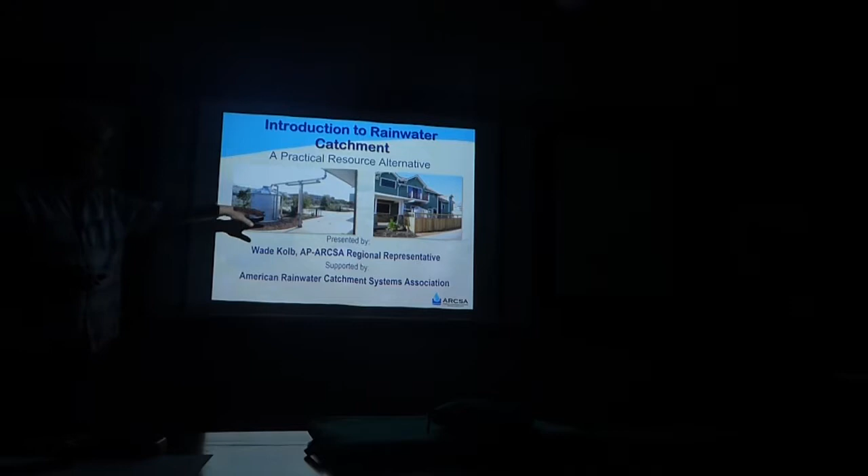They've kind of changed their rules around a little bit, but that's what the AP stands for. So everybody recognizes this, or most everybody here knows where that is at Eco Centro. And that's a great little system. I just never knew why they didn't plan on pumping the water to the back for the gardening area. It kind of just delivers water to some of these landscape zones, right?

And this is a little project that I worked on in the Mueller development in Austin. One of my first little residential things, and those lots are real tight. But this guy was going to get some solar panels and whatnot. But you can see how difficult it is to get your gutters and downspouts working to try to deliver as much water to the tank as possible.

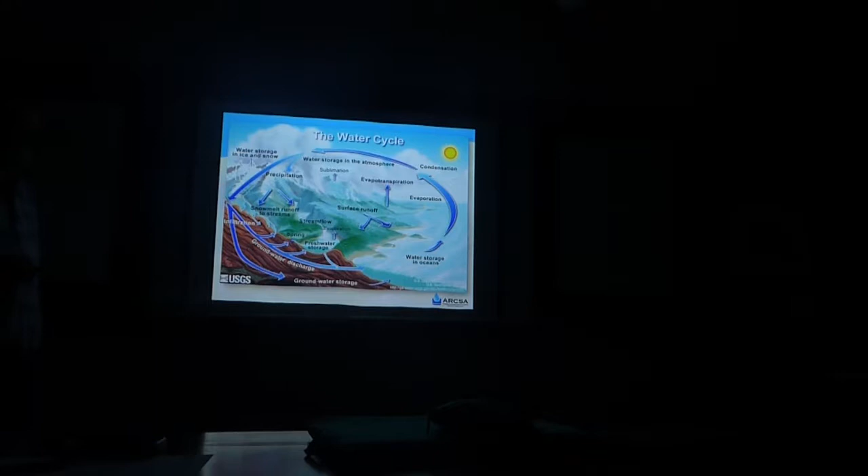So everybody understands the water cycle, I'm sure, from elementary school. We've got a serious deficit in water worldwide, and when I got into this, it was after the '08 crash, when I lost my permanent employment, and like a lot of things that's happened over the last 10 years, everything's just mushroomed for problems left and right. But this is a very serious issue.

Rainwater is the primary source of all water. As it falls, it's the purest water available. It's balanced pH, which is why the plants thrive on it. It doesn't contain any pathogenic or bacteriological agents.

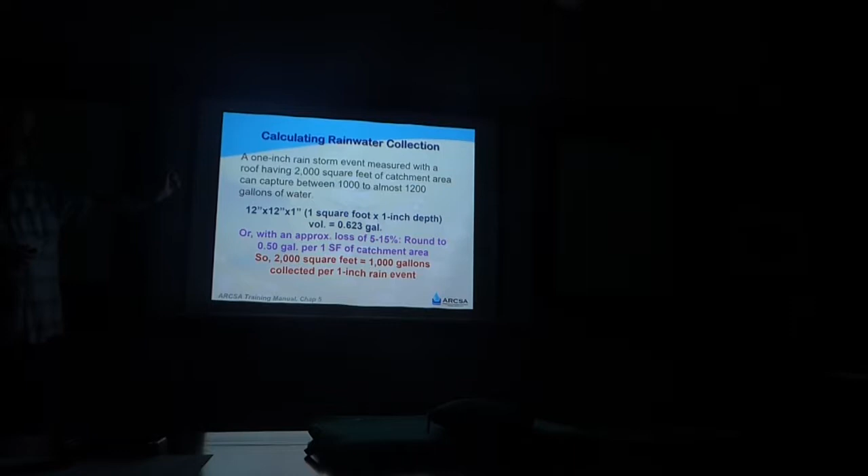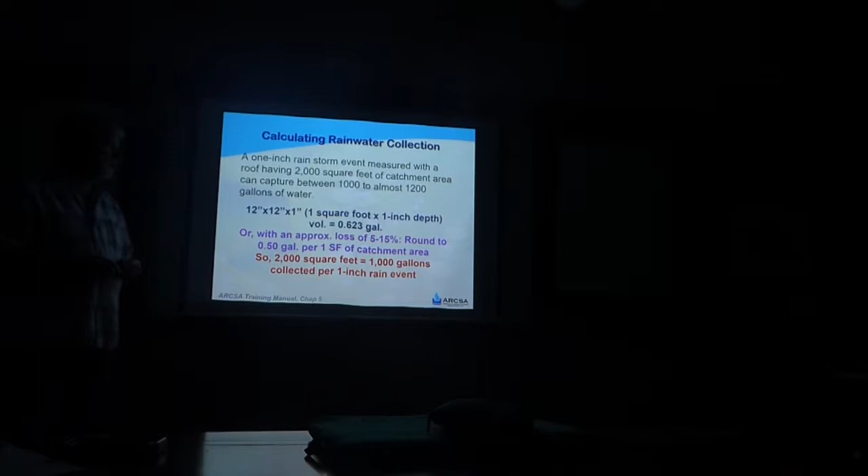So, real quickly, this is the official way to calculate how much rain you can pick up with an inch of rain on a 1 foot square. You calculate that as 0.623 gallons per inch. So really with the loss and splashing and first flush that we're going to talk about, the best way to think about it is a half a gallon per foot. So if you've got a 2,000 square foot roof and you get an inch of rain, you can pick up 1,000 gallons. Whenever I look at that, that's amazing.

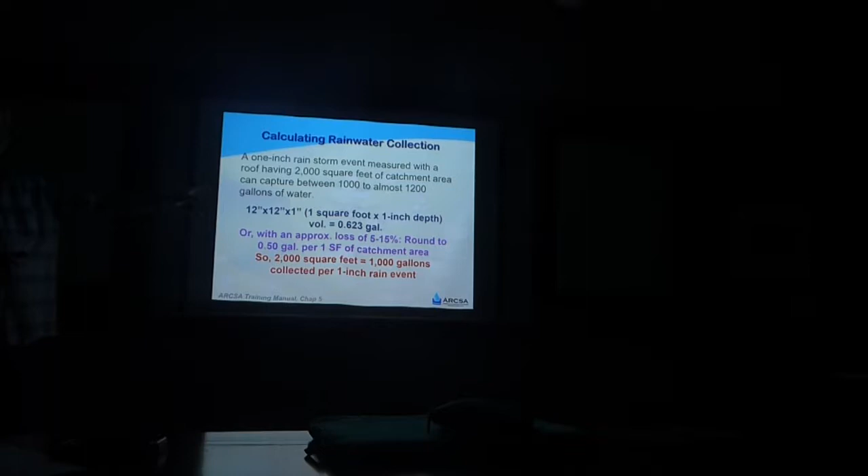I'm passing around the ARCSA manual. If everybody wants to peruse through that and look at it, you can look at chapter 2. My name's on that one.

When you really look at people that are living on potable use of rainwater, the best thing that they can do is learn how to take a Navy shower. If you can do that, you're going to be able to live with a lot of water with very little rain. And I can talk a lot about people who do live on rainwater, and they live on very little.

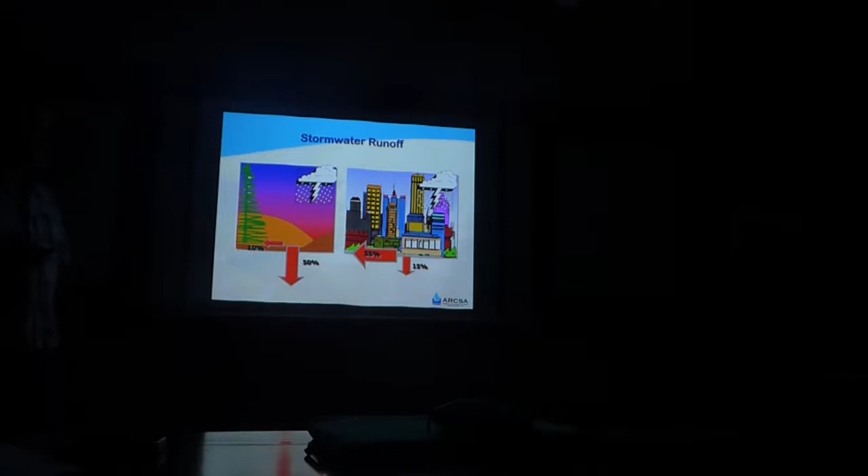What is a Navy shower? You have to turn the water off to soap up or shampoo, and then you rinse, and then turn it off. Okay, thank you. Yeah, people on Navy ships have to do that because they don't want to take a shower with salt water, right?

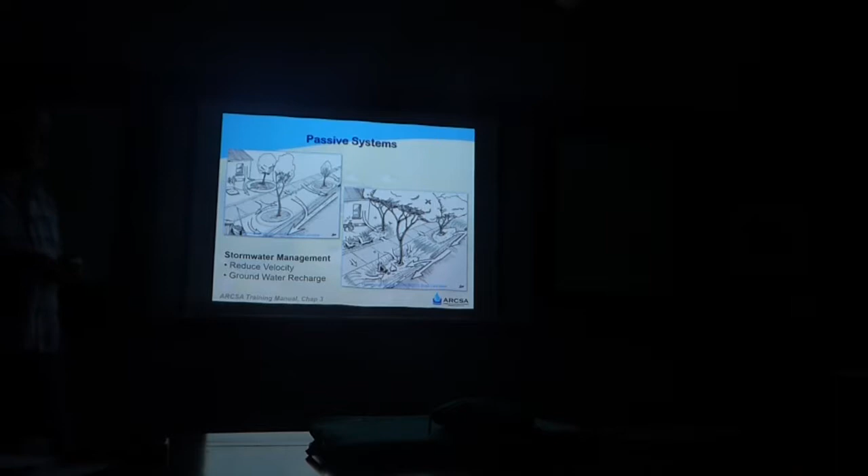So passive systems, there's passive systems and active systems. Active systems is actually the old plumbing and capturing the cisterns. But passive systems is part of the whole integrated design of thinking about water and what we're doing with it. For the longest time, we just made concrete trapezoidal channels and ran all the water out to the creek. But the thing is, you want to slow it down and capture it, get it to absorb back in the ground. I think Los Angeles, when they went through their real serious drought, they started trying to call it Sponge City. We need to get the water, keep it here. Let's stop trying to run it out to the river or to the ocean.

And so I think everybody at this point understands the value of rain gardens and these parking lot green infrastructure is what they started throwing around as a new term for, again, instead of putting it in concrete pipes and getting it out away from the building as much as possible, get it to absorb as much as possible. And you can do all the engineering and plan on if there really was a gully washer, if this fills up, you have overflows that will connect to storm sewers. And of course, just using a small container for a rain barrel is the good start.

A long time ago, when we were doing classes and when I was learning it, some of the older ARCSA guys, this all started in Hays County. Hays County has the most per capita rainwater capture county in the country. Really? Yeah. Wow. Why are they so advanced? Well, it started with the A&M AgriLife, and they were going through rain barrels with the master gardeners until somebody started saying, why are we doing 50 gallons? Why don't we do 500 gallons?

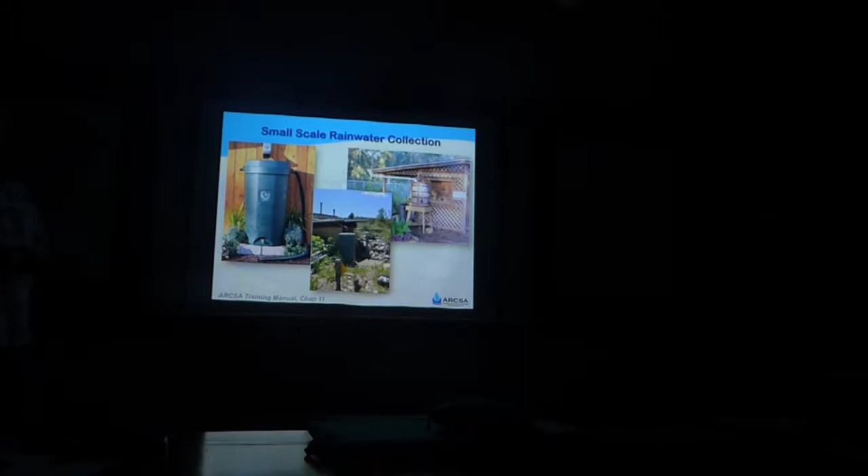And quite frankly, in Austin and in Central Texas, that's where ARCSA started. That's when they started having classes and whatnot. And the rain barrels was always referred to as the gateway drug to real rainwater harvesting. And so it's kind of burgeoned, it's part of LEED and part of a BMP for stormwater management.

This is a project that I didn't work on, but I knew the guy that was working on this. This was the first residential permitted non-potable water development. I forgot the name of it. It's some nice little boutique subdivision in South Austin. But the guy that was fabricating these tanks in San Marcos made the little first flush tank there, and of course the water runs into that first, and that picks up most of the debris, and then as the water fills up, it goes into that tank, which is theoretically clean, and then you had to do some post filtration before it went to washing machines and toilets.

Of course, plenty of options on where to put a tank and what kind of tank, and of course this is very hard to do in Central Texas. There's just rock around here. I like the aqueduct kind of a setup like this, which is, you get the tank away from the house and pump the water back to where you need it, back to the house.

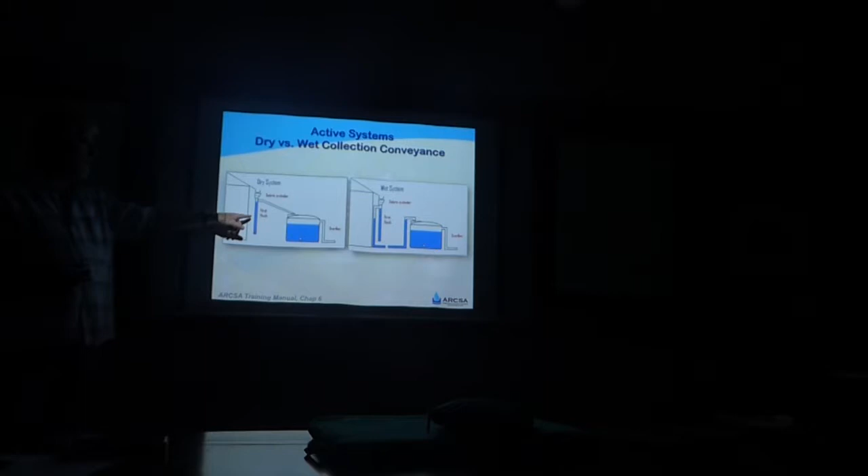So there's two types of active systems. I mean, this is how simple it is. This is referred to as a dry system because it evacuates after rain. And the first flush has an outlet here that's a slow valve or opening, and after the rain it'll drain down real slow. But as a first flush, it picks up all the crud and dirt, and then after the roof has been rinsed off, then you have theoretically clean water going into your tank.

And the wet system means that you're going to have an underground pipe that, again, you have to trench, but you have to have some kind of a valve in there to release that water after rain.

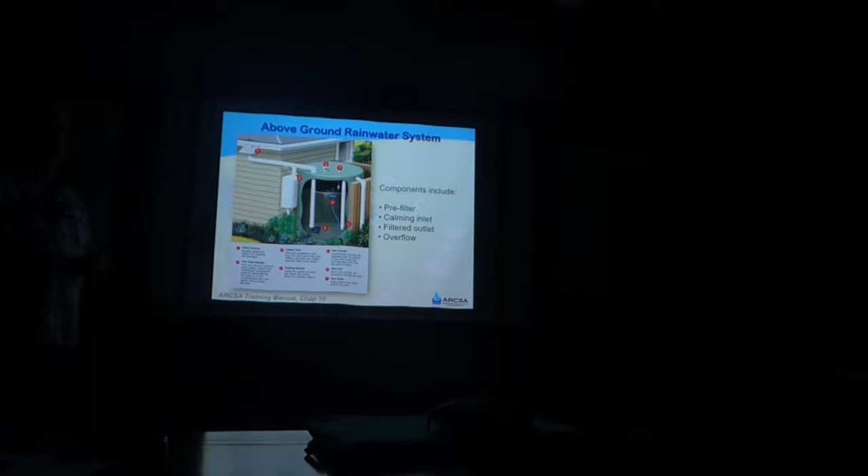You don't want that water to sit in the pipe. It's okay to sit in the tank. The tank needs to be opaque. You don't want to have any kind of light coming into the tank. This is an Australian company that made this. The Australians were on the forefront of rainwater capture and reuse because they had a 15-year drought. And they've just been all over the map with fires and floods and droughts.

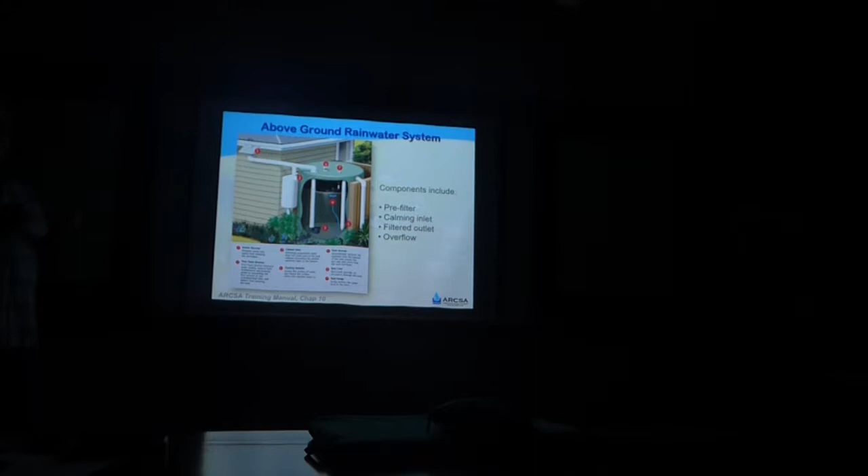But anyway, these are simple component systems of a good rainwater system, and this stuff is all over the internet. 10 years ago when I first got into this, it was kind of hard to find information, and now it's just an avalanche. And the Australians, actually sometimes that was the only place you could get filter systems or measuring devices or the plumbing, and you would have to go to Lowe's and try to hook up a metric pipe fitting to a standard pipe fitting. That's a lot of fun. But anyway, it's just pretty simple.

So the most important part of rainwater capture is pre-filtration. If you can keep the water clean going into a tank, just like people did for tens of thousands of years, it's possible to keep it super clean and actually not even need a first flush, even though there's a lot of code being written out there about using a first flush.

This is a German company called Wisy, W-I-S-Y. This is a vortex filter. This keeps the water super clean. There's a grate in there. It kind of goes around in a vortex. And your bad water, your water with some debris, gets dumped down on the ground. The other good water goes to your tank. This is a new device called a maelstrom that apparently is very effective.

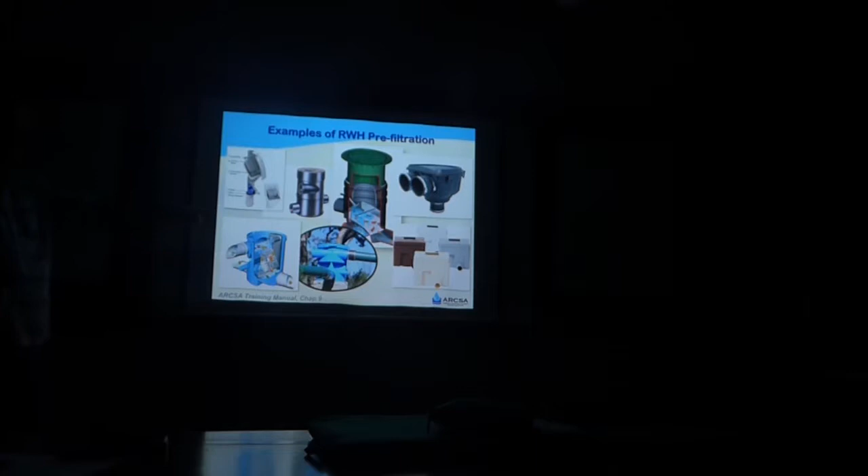And then again, there's a lot of smaller ones. This is an Australian product here. I don't know that much about these guys in the middle. That's a simple little interruption where you can cut a downspout and put a little filter and diverter on it, that anybody can do. But this is an example of all the different kinds of products that are out there and things that you can do to try to make it aesthetic. And I'll show you a couple of these that I put in.

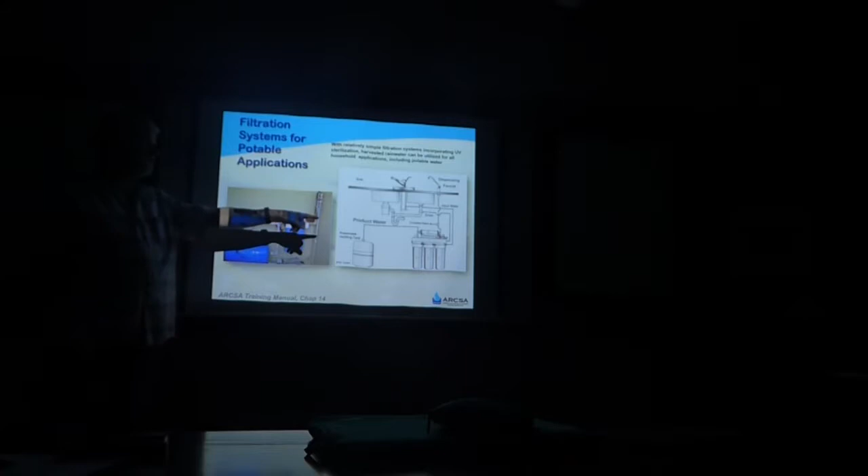And so the post-filtration: after you get it clean into your tank, into your cistern, and you want to bring it into the house, it's pretty simple to have a coarse screen and a fine screen, and then bring it into a UV lamp, and then it's ready to be consumed on a potable basis. I like this little diagram over here because of the way you have to retrofit a house for rainwater. I think it'd be possible to have a potable tank near your kitchen, and a lot of this stuff is off the shelf now. You can buy this and pretty much screw it into the wall. The plumbing to do all this is pretty simple.

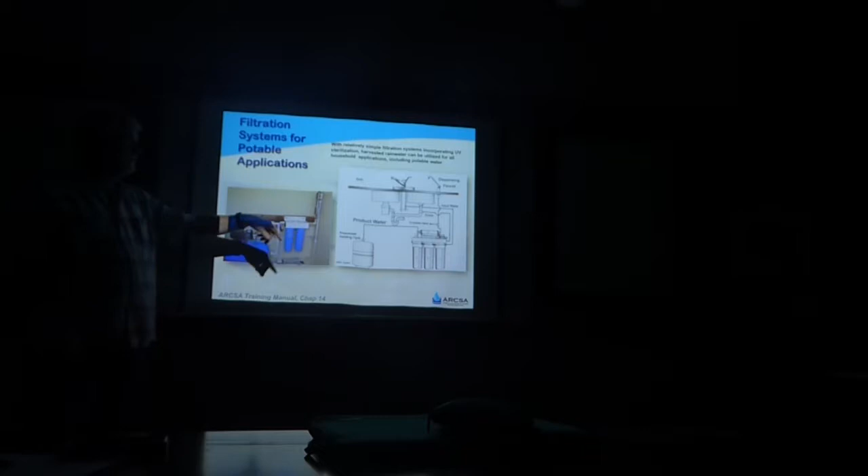And of course, again, there's codes, and the plumbers, I can tell you how Texas was, we kind of wanted to have an association with them, but they kind of just took a lot of it, and my comment always was, plumbers don't want to work outside, it's hot. They want to work inside with the air conditioning running. But to bring water in with a tank on that side of the house, and maybe on the other side of the house, you would have a non-potable system to take out to the garden.

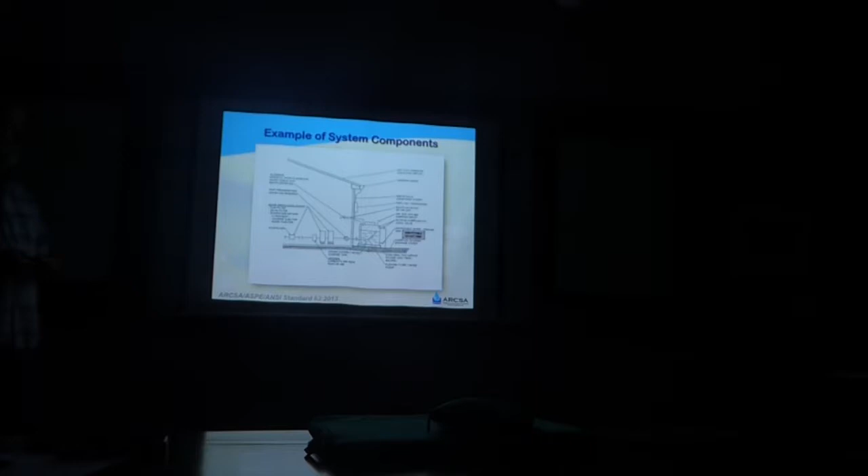Well, how do you feel about the ozone? It's just silly, the stuff that you have to do, and chlorine, no one likes chlorine. And the ozone, I really don't know that much about it. I've just kind of ignored that. That's why I'm kind of advocating that, if you're gonna do this, look at UV lamps. And they're all scaled up to however much water you're gonna use. And I think there's something else. Obviously, there's plenty of non-potable use.

So rainwater, again, is stormwater management. It's included now in BMPs for stormwater, for TCEQ and whoever. And so outdoor use, indoor use, and then you definitely want to make sure that you're in code compliance.

I think the city of San Antonio these days is opening up to allowing it. SAWS actually was, oh, well, we're doing all this work to be green and whatnot, when they really were just kind of paying lip service to the industry. But I think they've gotten better. I've kind of lost touch with what's going on in San Antonio and Austin, quite frankly. I mostly worked in Austin when I was doing this.

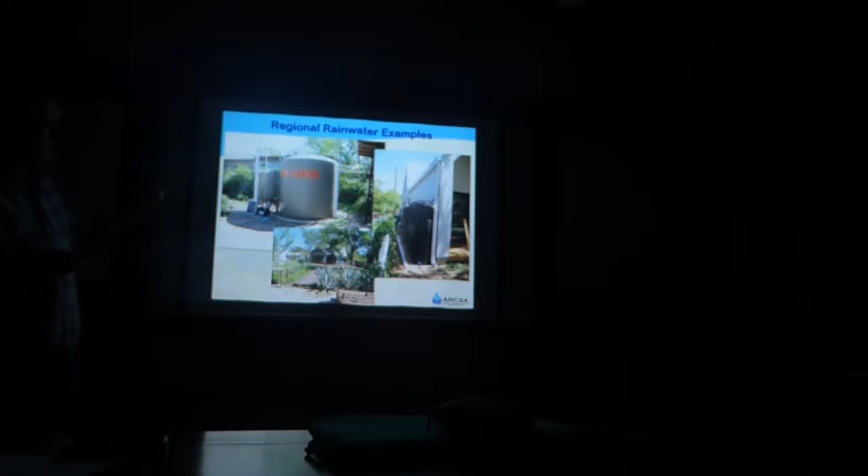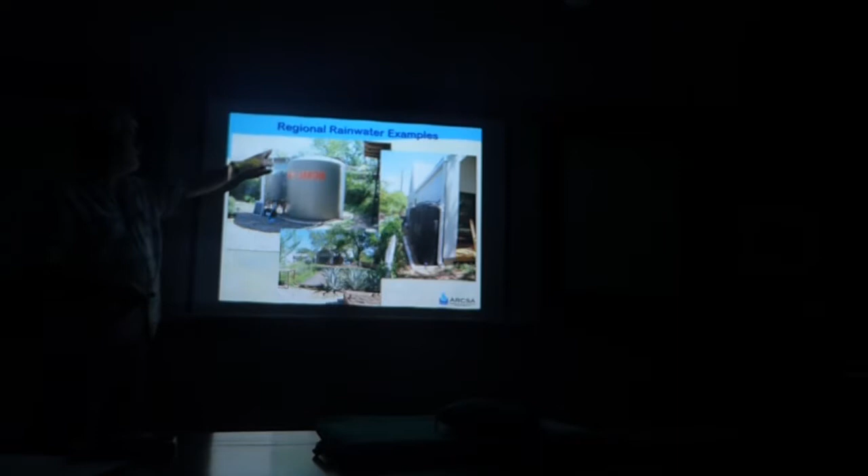So we've got water being picked up off of the roof, and it trenches all the way back to near the shed, in his garden. He's got some raised beds. You can see the purple pipe. Those are drip emitters, and he's got about 6 or 8 of those that he's feeding. I found this solar cell pump, because if this doesn't come up higher than that, you're gonna have pressure that's incredible that builds up in those things.

It's simple physics. And these are the two slim lines that we were just looking at from another angle. I mean, it's not the same site, but they fit really tightly in there. That's right next to the house. You can kind of see them right here. So we captured most of it, except for some of the roof line that's going off to the front. Actually, there's downspouts on two of those garage standards.

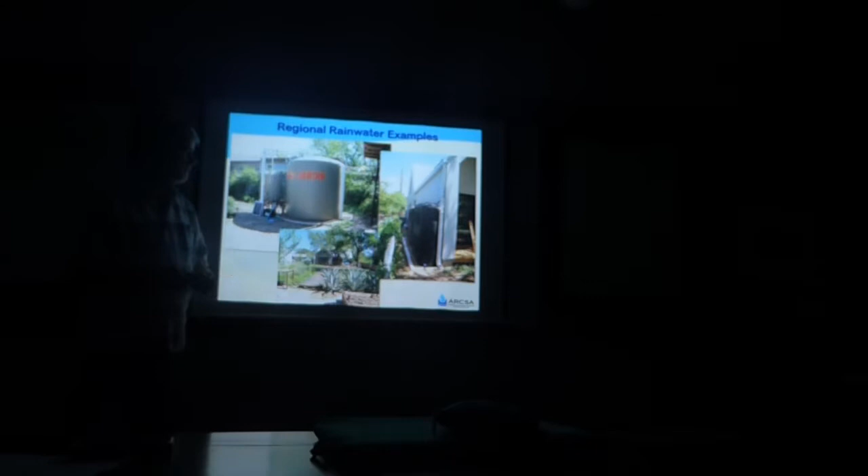This is a place in Westlake where this guy was building a custom house, monoslope roof, perfect for rainwater, plus he was going to do solar. And I coordinated with the gutter guys to do a custom gutter. That's an 8-inch gutter, and it's 72 feet long. So these two tanks will fill up in like a 2.5-inch rain. And those are 250 gallon.

And I get in to do this, do some drawings to figure out what all I'm gonna need. And plus, with my angles, I can tell the guy who's gonna be making the tanks where my outlet is and where the overflow is gonna be. And here's the vortex filter on the wall right here. And some of this geometry was real tight. But this is it again. I think this is a good system.

You know, I spray painted the plastic to make it look good, and there's a small pump, one of the pumps that we just looked at. And again, you could flip this guy on and hook up your hose and drag that hose all over the yard.

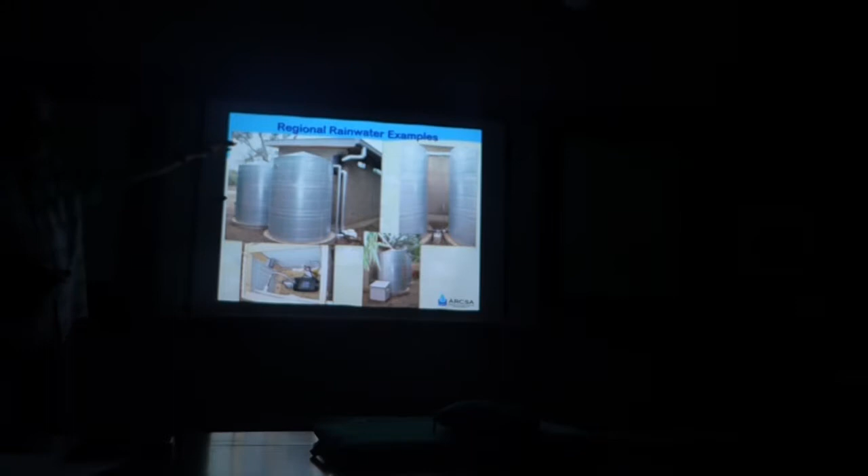That thing in the middle over there on the far right is a clear tube. I hooked up some plumbing on that to where you can open the valve up and it will equalize to tell you how much water is in the tanks. And then you can close that off and drain that because you don't want to leave water in there. It'll get septic. It'll get, you know, yucky.

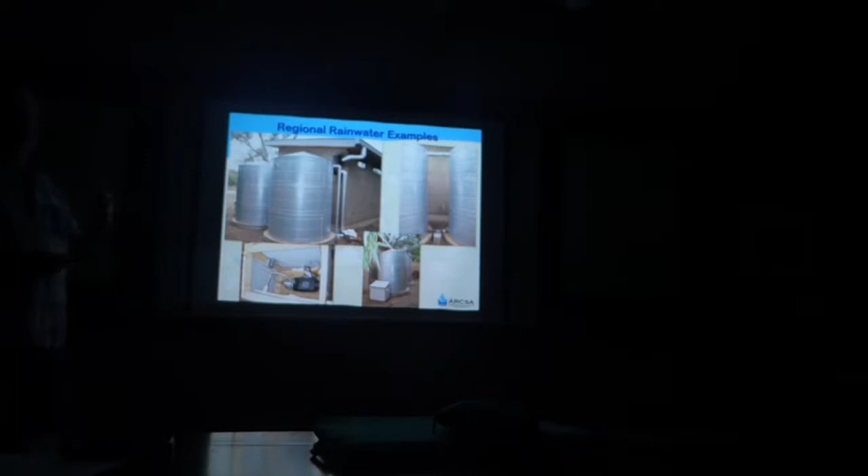This is a place in Driftwood, south of Austin. This was a house before. We coordinated with the gutter contractor, and then we put downspouts, and these are all trenched around the house and go to the back of the house. You can see over there. So we had on that other side of the house is this side, and so we picked up about 100% of the roof. This is the contractor putting in the 20,000 gallon tank.

You can see it sits on a sand bed, and it's going to have a food grade liner on it that hangs on these walls, and then they put a cover over the thing. And those are just protection because the bolts come through there, and so with the food grade liner, that protects from any kind of puncturing of the liner. But it's got a first flush tank and pump feeding back to the house.

This was coming in from the well. The reason why he and his family wanted this is this was like 2011 and 12 when it was really bad drought, and he just wasn't getting good water. So we hooked up the plumbing from the rainwater tank to interrupt the water from the well, so you could either take the water from the rainwater, whatever your needs are, or from the well, and it comes up here.

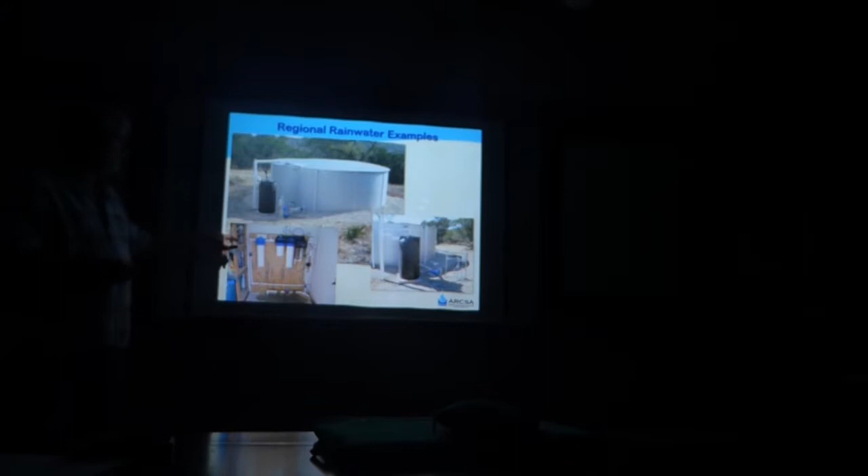So anyway, it's a good system, and this 2-inch pipe comes all the way back from around the garage, the driveway was right here, and he wanted a pipe with a fitting so he can get water delivered to his house in case of a big drought. So he could have tanked in water. If the well's no good and if there's no rainwater, he'd still be able to get water. And so he'd be able to put it into the cistern here.

This is a place near Winedale, Texas, between Houston and Austin. This guy expanded his kind of barn, equipment barn. It's a second home, an older place that's been remodeled. But these are fiberglass. When I called these guys up, they were just down the road in Giddings, it was really nice that was close by. Delivery cost was hardly anything.

But I said, well, do y'all have this in gray and green? And he said, no, we have it in any color you want. And I said, what do you mean? Is this like Home Depot? You bring in a little sample? And it's like, yeah, we'll make it any color you want. And so that's a new thing, but you know, the client just said, no, give me some gray ones.

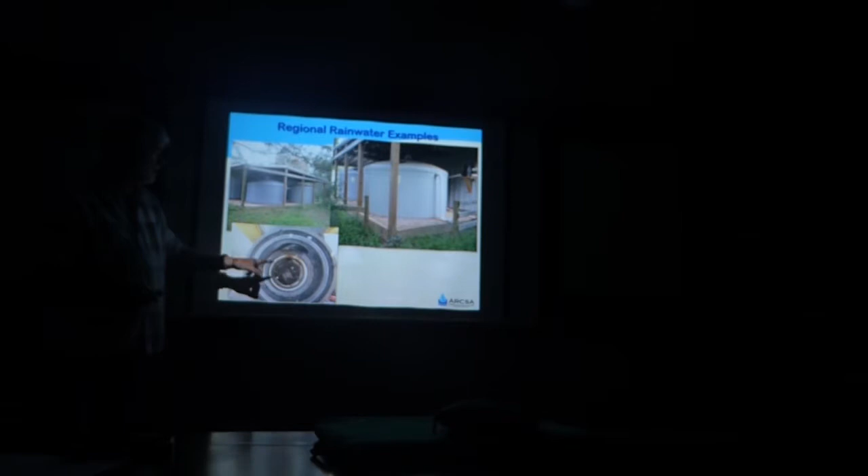fines, because there's a lot of cedar trees here, and so you can see how the water comes in right here. So it's forced around, and so the debris is kind of in a vortex, and then the water is able to go through this grate and go into the tanks here.

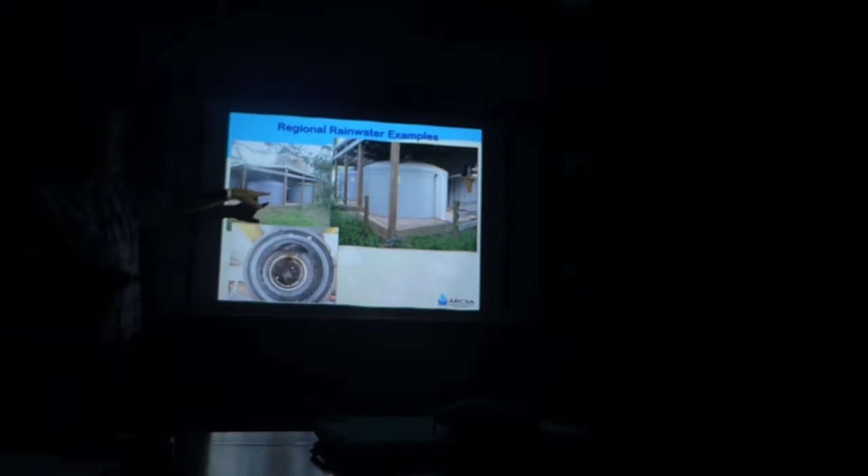And I kind of advocate, a lot of people and some texts online and whatnot will just show the connection at the top, because if this fills up, it'll spill in, but I like for it to equalize down here at the bottom. And also you can put a valve on that for any reason, and obviously having another outlet here, because there's one on the other side. He was going to bring this into his garage with a pump, and then pump it out to his garden.

So ARCSA, I got to give this little spiel here. Their slogan is to promote sustainable rainwater harvesting practices to help solve potable, non-potable, stormwater, and energy challenges throughout the world.

I don't know if y'all are aware how the nexus between energy and water have a lot to do with, you know, because all the electricity we use, we're using water to generate that electricity. It's got to cool pumps, it's got to do a lot of things. I mean, everything's like, oh, how many gallons of water did it take to make your pair of jeans? Oh, 70 gallons or whatever it is. I don't know what it is. I'm probably over-exaggerating, but I'm probably not too far off. It takes water to do everything.

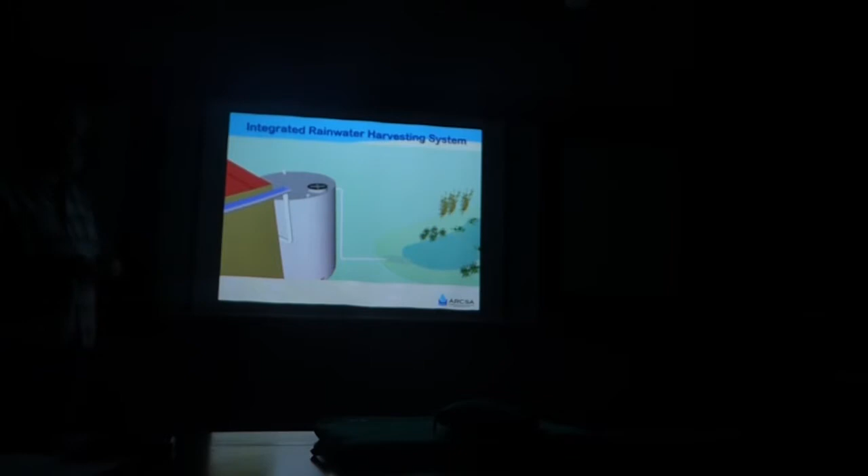So this is a little SketchUp model that I made a while back, and I've kind of embellished it a little bit, being inspired because nobody's asked me to talk in a while. But this is a video again. Let's pretend this is earthen construction, and of course you want solar. You want a good roof that's certified or a good material. You want a screen on your gutter system, and again, your overflow needs to be put back in the ground as much as possible.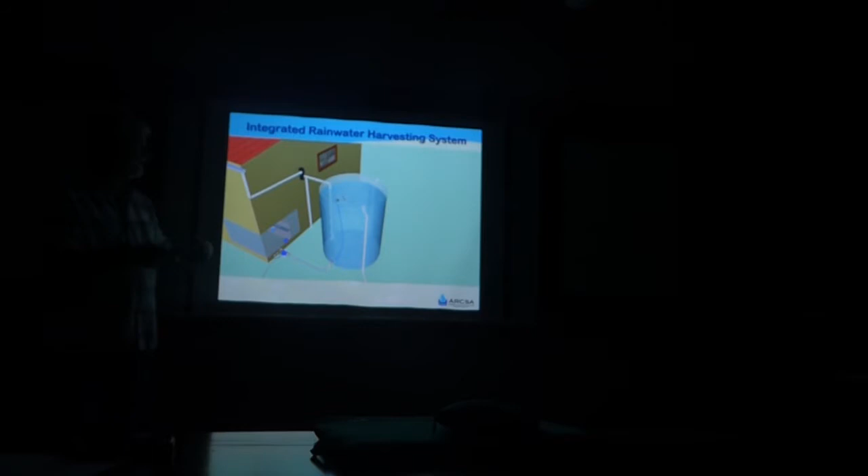I'm showing this first flush as being the German vortex, and again, all the component parts, a calming inlet that keeps it from getting turbulent, and floating outlet, and then purple pipe to come out to the garden, and then if you bring it inside, the coarse and the fine screen and the UV lamp, and after that, the plumbing can be white. Of course, there's a lot of code that says you have to label all of that stuff.

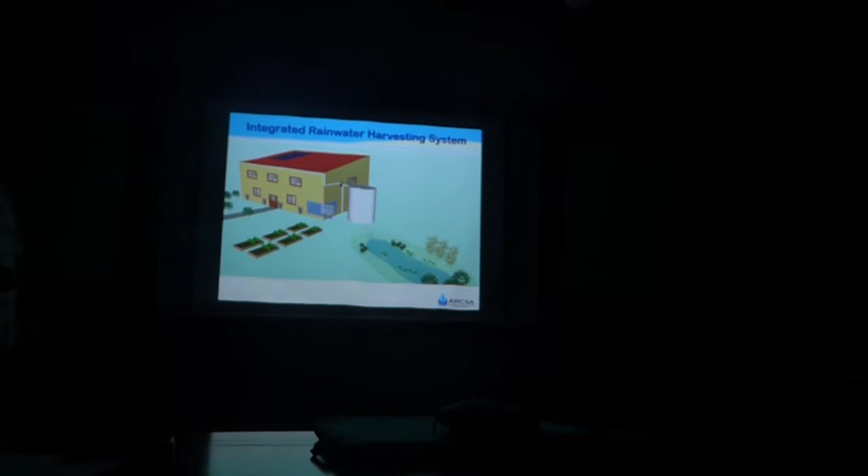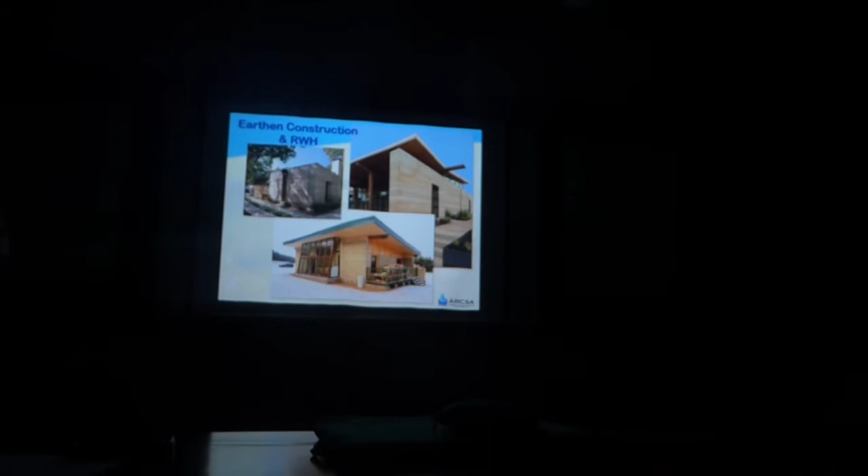I have a question. You had mentioned the roof being of a certain material. What materials are not good, and what materials are? Clay is not good. Actually, asphalt, for the longest time, because the industry was so new, people said the asphalt shingles have the little fines that come off. Yeah. You can interrupt that with your first flush. People were saying you can't do potable with asphalt shingle, but there has been some science to that.

It's like, you know what? If you've got the micron screens, you may have to change your filters more often when it comes into the house. But you can actually use the asphalt shingles. Okay. But metal roofing's always the best, and you can find information about that these days.

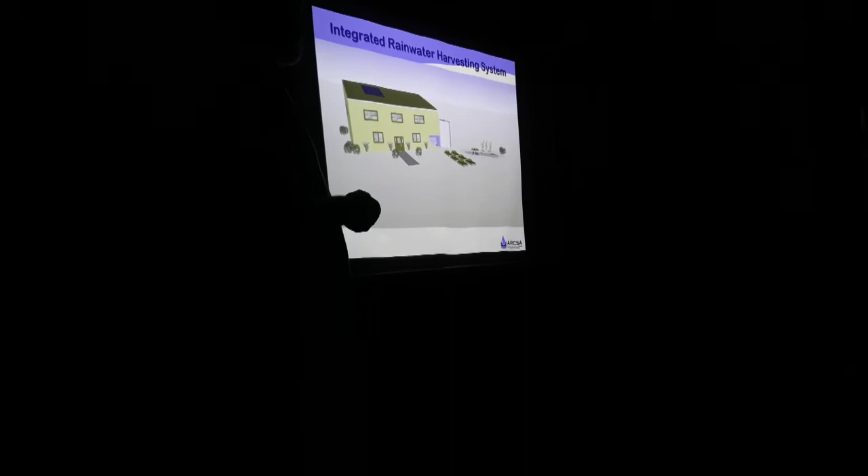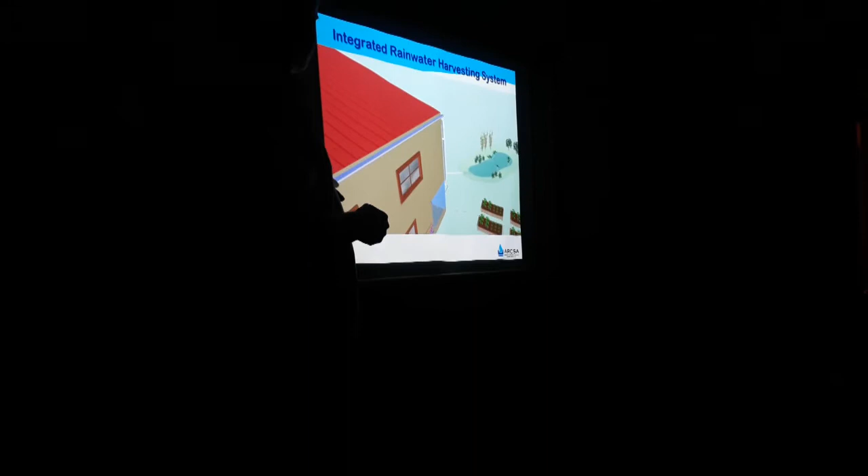So this is a little SketchUp model that I made a while back, and I've embellished it a little bit, being inspired because nobody's asked me to talk in a while. Let's pretend this is earthen construction. Of course, you want solar. You want a good roof that's certified or a good material. You want a screen on your gutter system, and your overflow needs to be put back in the ground as much as possible.

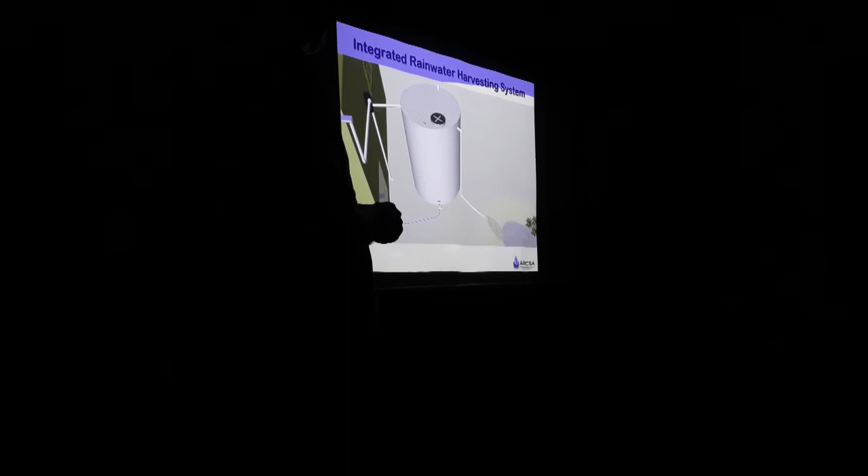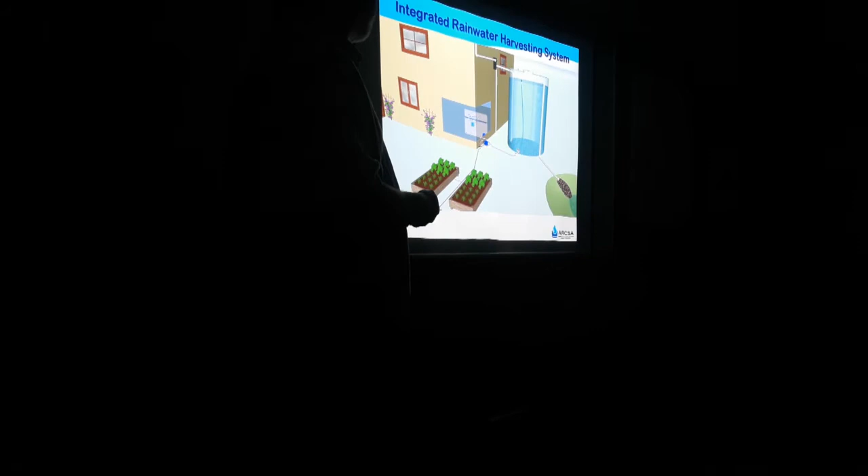I'm showing this first flush as being the German vortex, and all the component parts: a calming inlet that keeps it from getting turbulent, a floating outlet, and then purple pipe to come out to the garden. And if you bring it inside, the coarse and the fine screen and the UV lamp, and after that the plumbing can be white. Of course, there's a lot of code that says you have to label all of that stuff.

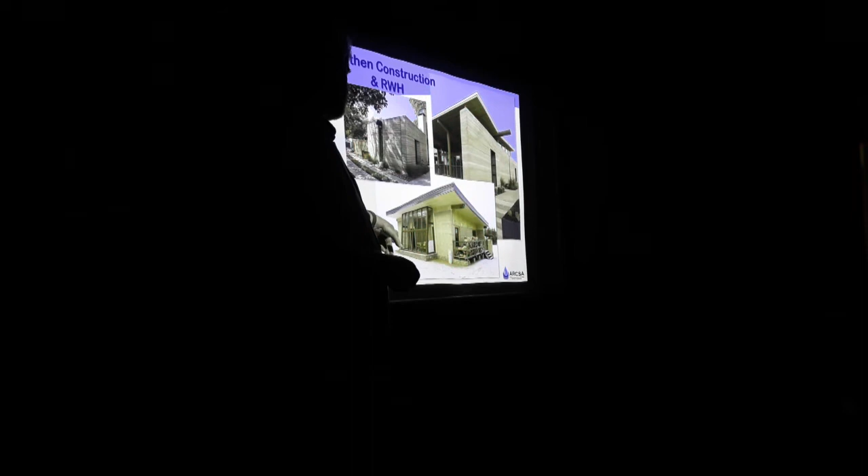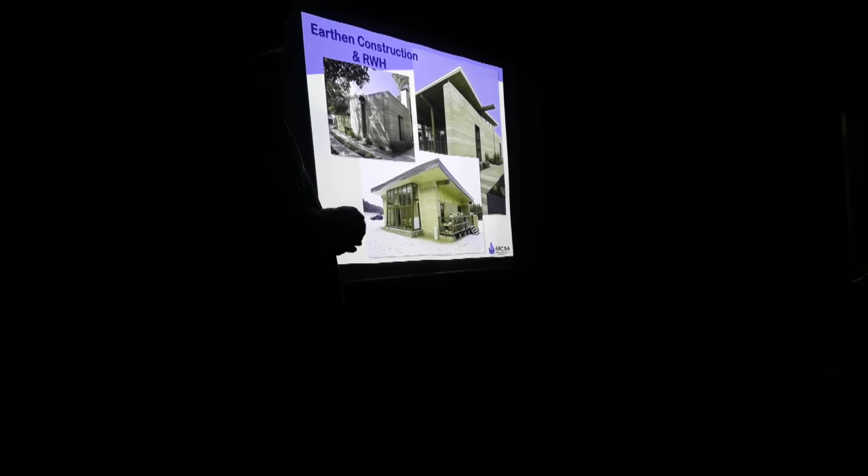Anyway, this is a couple slides that I borrowed from Ron, and this I found online a long time ago. I think this is in Poland. What I'm trying to show here is that earthen construction is so dynamic, but you can't put a lot of gables and roof lines and stuff like that. You can't work with that when it comes to rainwater. A butterfly roof or a monoslope roof is really what you want.

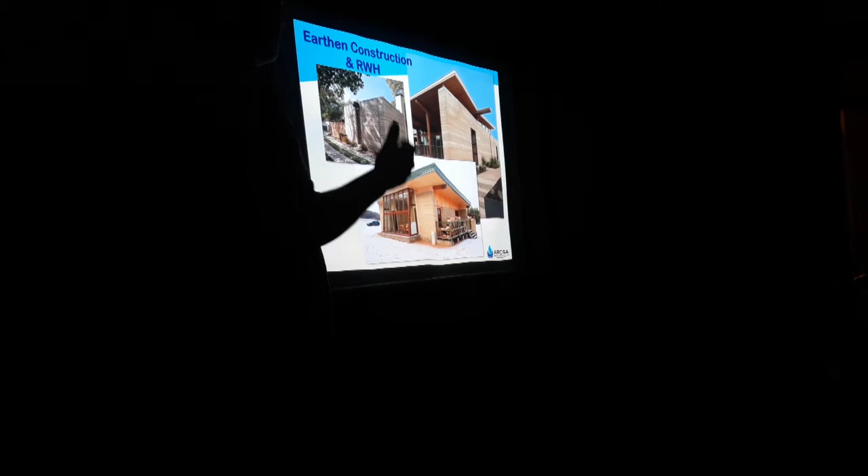I don't think there's rainwater on this one, but you could easily do it with a big gutter and a tank in the back. Also this kind of flat roof, an adobe kind of basic design, you can get the roof to drain. There's a rain chain, you can barely see it on that outlet there, and you think, well, a metal tank or a plastic tank is just going to totally remove the aesthetics from the architecture.

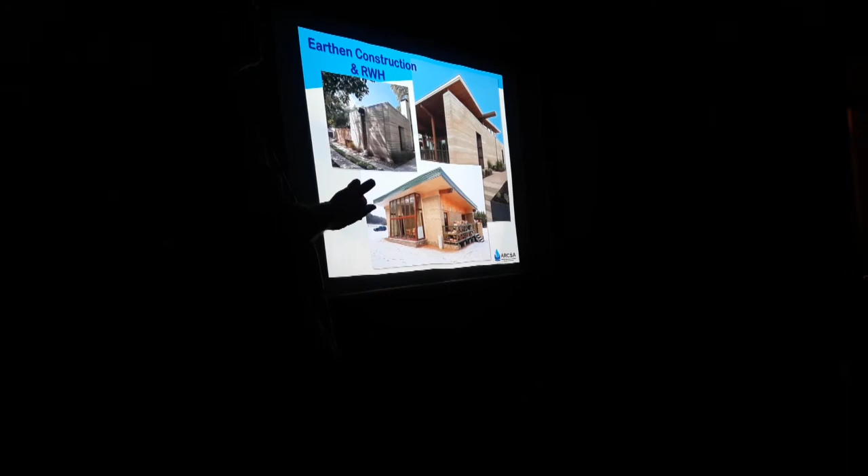But if you can figure out the aesthetics and the design, it's always worthy to have a functional building, and that's why it's crazy. Some of the HOAs say, oh, you can't have solar panels. Well, I'm sorry, and most of the HOAs, they can't.

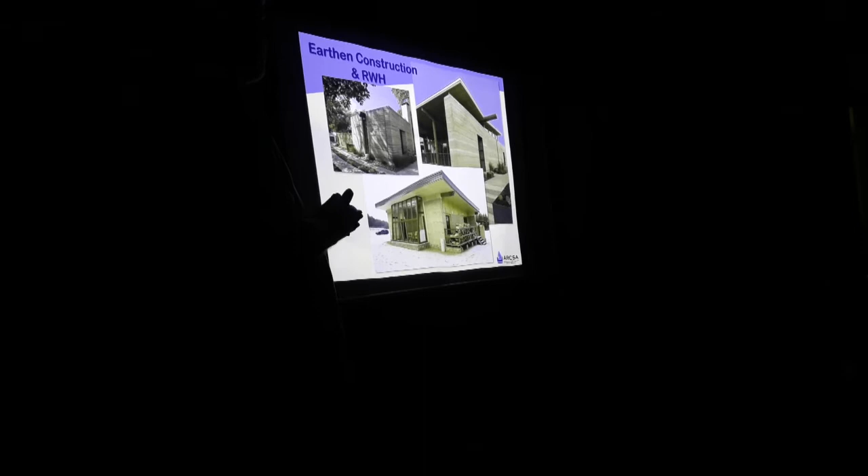Texas denuded the HOAs when it came to rainwater a long time ago. Texas has very forward-thinking laws on rainwater. It's not taxed, and if you put in a 10,000, 20,000 dollar system on your house for rainwater capture, your ad valorem tax can't go up accordingly. It's not taxed.

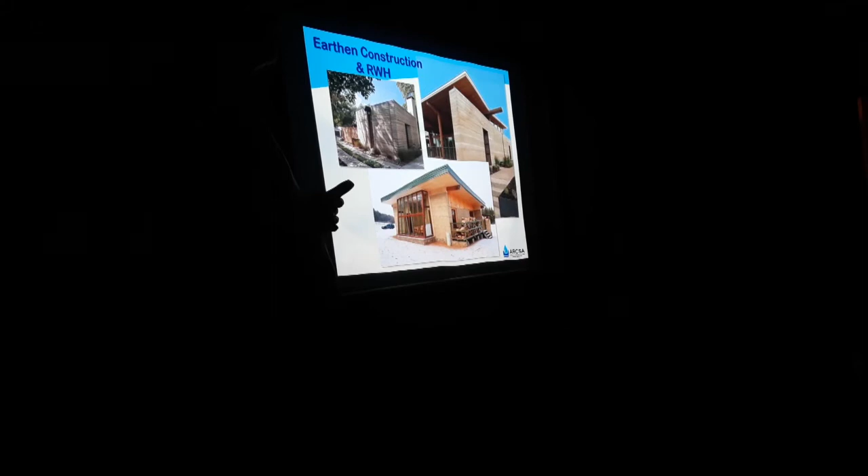And so, anyway, this is my last slide. I've got the actual SketchUp on my computer if y'all want to kind of look back at what these components are.

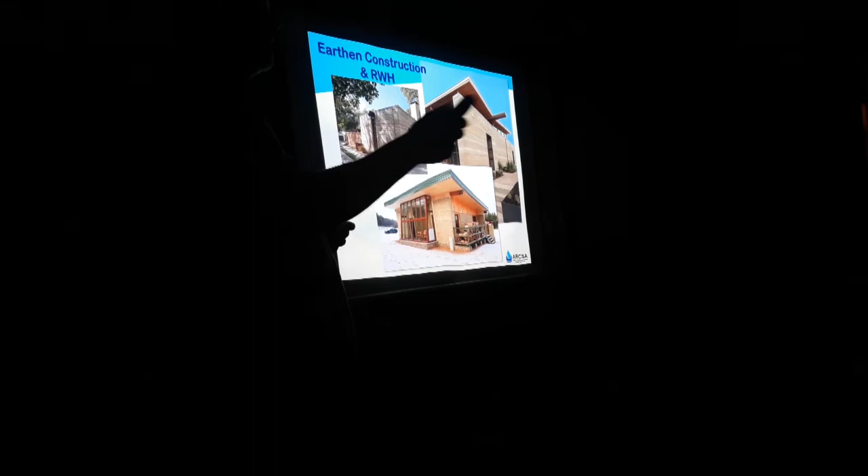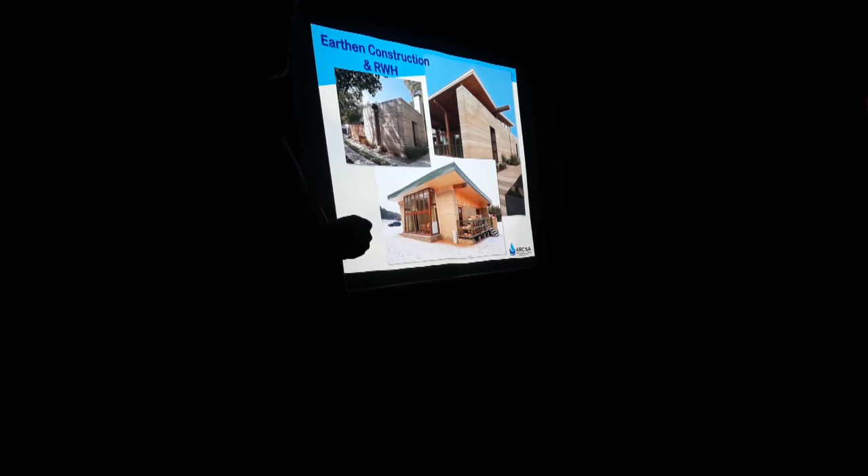But, you know, my first experiences here with y'all's group, I was kind of hoping, I know that y'all are planning to do these sorts of things, but using something like SketchUp or any kind of a CAD program to put some examples on the website, some details, a house or whatever, and just to say, hey, this is how it works. And again, I know y'all are talking about that. We'll get there eventually. Thanks for reminding us.

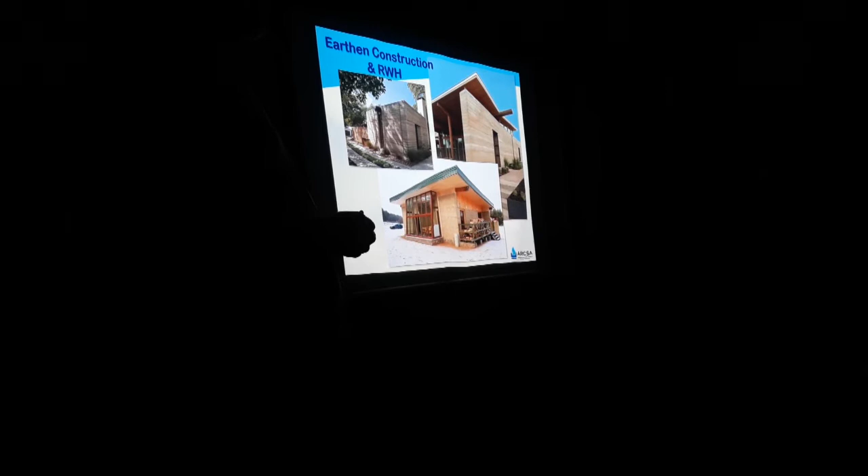Oh, I know, and whatever, I like the program. I've gone through a whole bunch of tutorials. It's a great program. And I work with AutoCAD all the time, civil engineering. So I don't do this full time. I do something a lot worse. What do you do? Well, I sit in front of a computer all day.

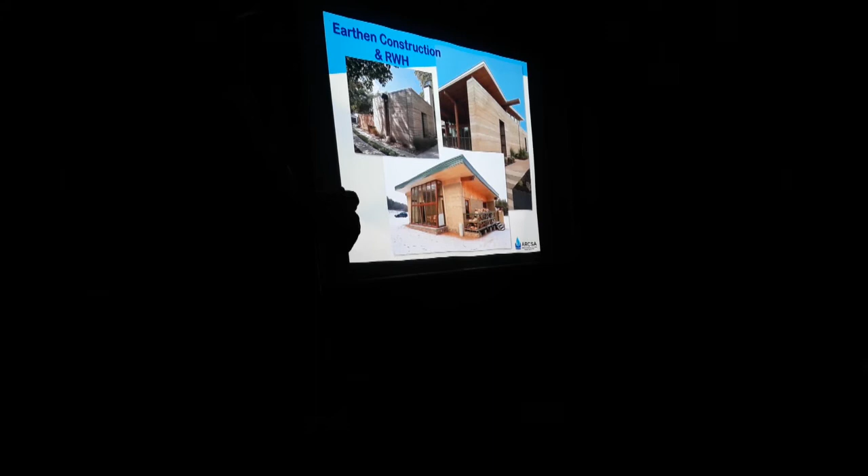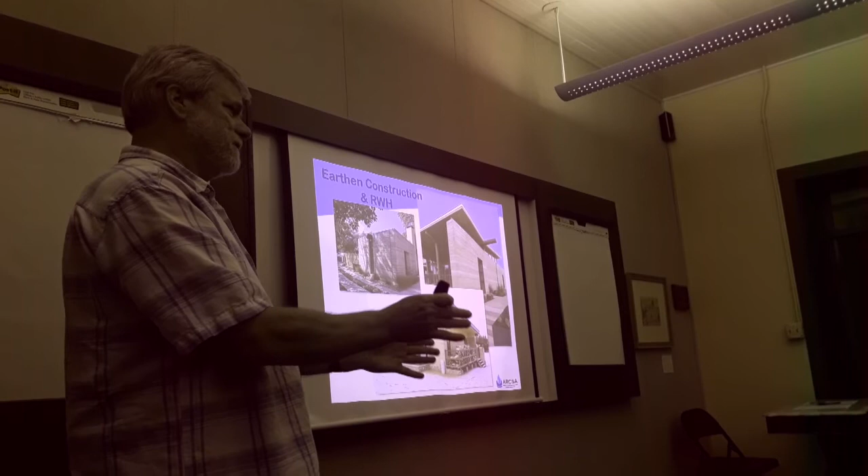I have a question. You had mentioned the roof being of a certain material. What materials are not good, and what materials are? Clay is not good. Actually, asphalt, for the longest time, because the industry was so new, people started seeing the asphalt shingles. They've got the little fines that come off. You can kind of interrupt that with your first flush. But people were saying, no, you can't do potable with the asphalt shingle.

But actually, there has been some science to that. If you've got the micron screens, you may have to change your filters more often when it comes into the house. But you can actually use the asphalt shingles. But metal roofing's always the best, and you can find information about that these days. But slate and clay are not good. So the asphalt's okay. Clay tiles are good?

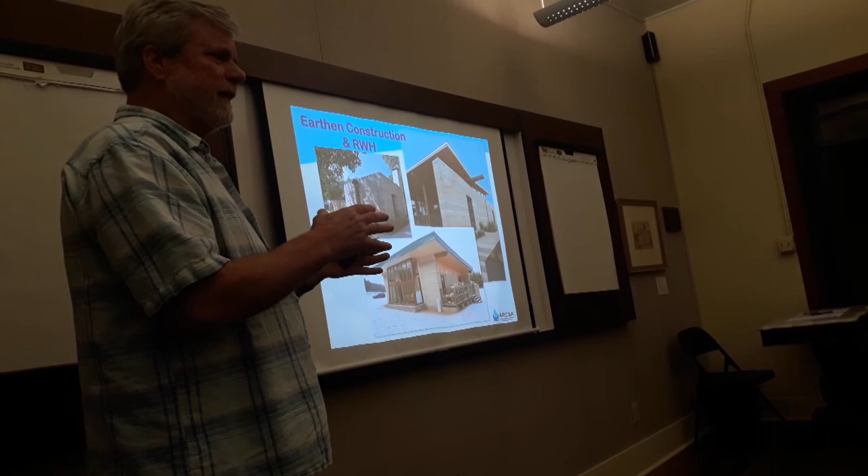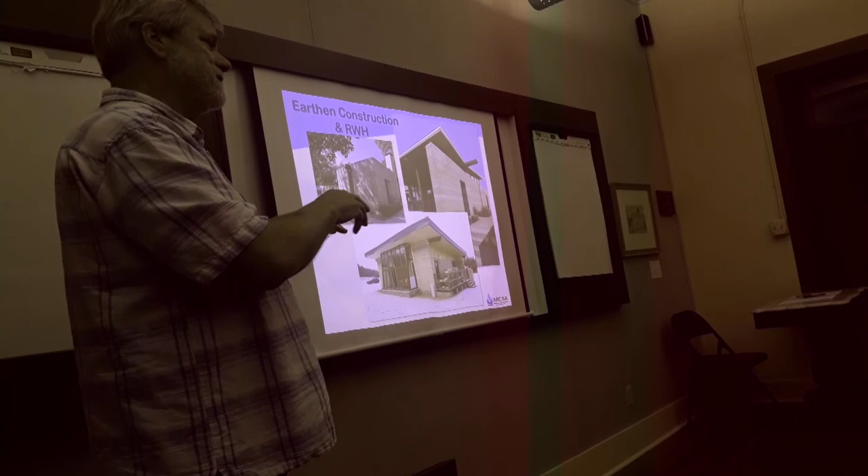No. They kind of hold. They'll hold some bacteria or something, whereas a metal roof should flush. That's the whole thing. You get bird doo up there and whatnot, and that's the big fear. Actually, raccoon is the big fear, but bird is part of it. It's not just the debris from the trees. You're actually trying to clean even the stuff that will really make you sick.

And the giardia and the cryptosporidium, those bugs are being neutralized with the UV lamp. It doesn't kill them, but it neutralizes them so they can't reproduce. And if you're kind of grossed out about that because you're passing it through, it's okay.

And this one guy who used to teach it at Menard, he's one of the guys that started in Hays County. He was the AgriLife director over there for years. He helped get all this stuff started. He used to quote something out of the Bible like, drink from your own cistern. And it really makes sense.

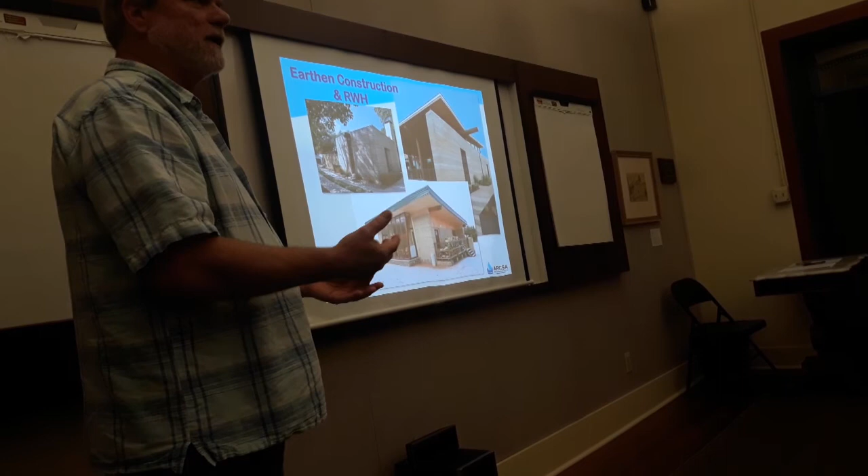If you go far down the road to somebody else's cistern, they've got other microbes getting into their cistern. And again, people lived on this stuff without any problem. There's still people who live out in the country. We used to have a state conference, I used to go to the national conference, and it's an annual thing. They've collaborated with the irrigationist conference, and that's really where we should be.

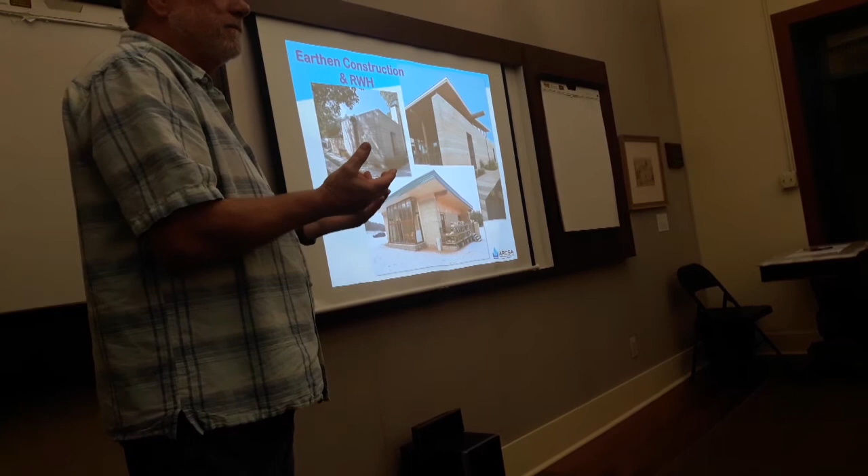We should have licensed plumbing indoors, and we should have licensed irrigators, and there should be licensed rainwater in between those two. And it'd be a real simple process to have professional involvement with these systems.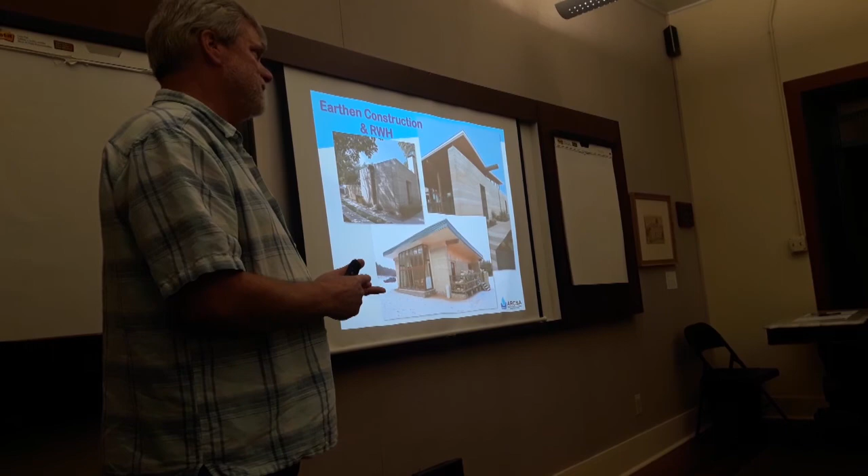So there is a recognized certification system? Well, ARCSA is the only thing going on out there, and actually, at the end of this year, anybody who's an ARCSA accredited professional is gonna need to take a test for the American Society of Sanitary Engineering. And they've kind of got together to say, we'll take over this nationwide, and then you have some municipalities that are saying right now that we're not gonna allow anybody to get a permit for a potable system in the city unless they're an ARCSA AP.

So, I've learned a lot, and it's pretty simple. You just wanna keep it clean getting into the tank more than anything, so.

Is there a document or publication you can download for free from the Texas Water Development Board? Well, the Texas Rainwater Manual is still available, but it's out of date, and I think Ron told me the other night that he had looked at it a little bit, but the fundamentals are there. And this manual that ARCSA publishes, if you want to show that around to anybody else who wants to look at it, it's pretty involved, and that thing is about $70 for the color version. I think they want to charge maybe $50 for black and white, but again, it's all about making a little money on the top end, like everybody else. They're nonprofit, so.

Wait, the ultraviolet lamp, I guess there's some sort of monitoring system so you know when it's... The manufacturer will have, like, this is good for 12 months, please replace this in 12 months. Okay. They're a little pricey, but it's not bad. Aren't there some that have an audible alarm when the bulb goes out though? Oh, yeah, if it goes out on you, that's something for immediate attention, for sure.

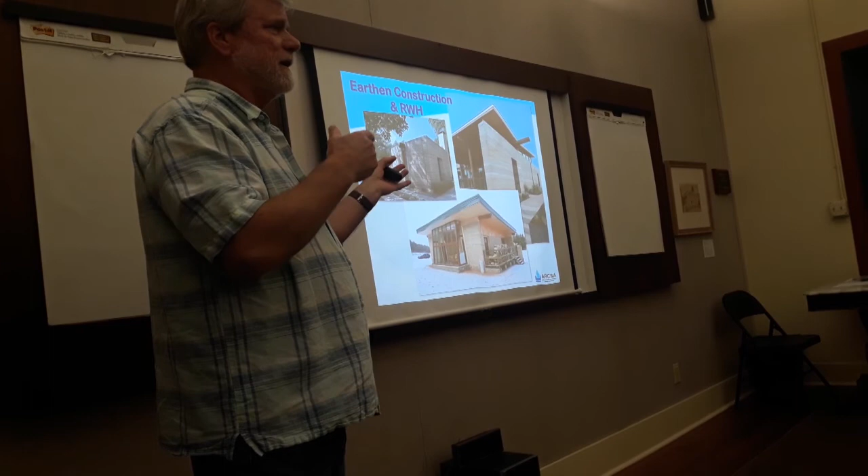Why do the tanks need to be opaque? Because light will cause algae. Okay, even though there's some ultraviolet. Yeah, some of those plastic tanks, like that 500-gallon tank and the smaller one, you can look inside of there and it's kind of like, wow, there's a little bit of light coming in. And those guys are out of Austin, and they started making a black liner on those things because they have different colors. Like anything, you can get the plastic resin in all kinds of different colors and swirls and stuff like that. But yeah, that's kind of important.

And even if you have a rain barrel and you're not pre-filtering it a lot, it's a good idea. This guy up in Ohio, he works for the EPA, and he's actually done some scientific experiments, and he says that once a year you should dump out your rain barrel, put a tablespoon of Clorox and a whole bunch of water and rinse it out and just clean all the algae out, just in case a kid sees a spigot and wants to drink it.

And actually the code in Austin says that you can't put a hose bib on the side of a rainwater system because it looks too much like a hose bib on the side of a house. You have to make it a different kind of fitting. You can't use the typical brass hose bib.

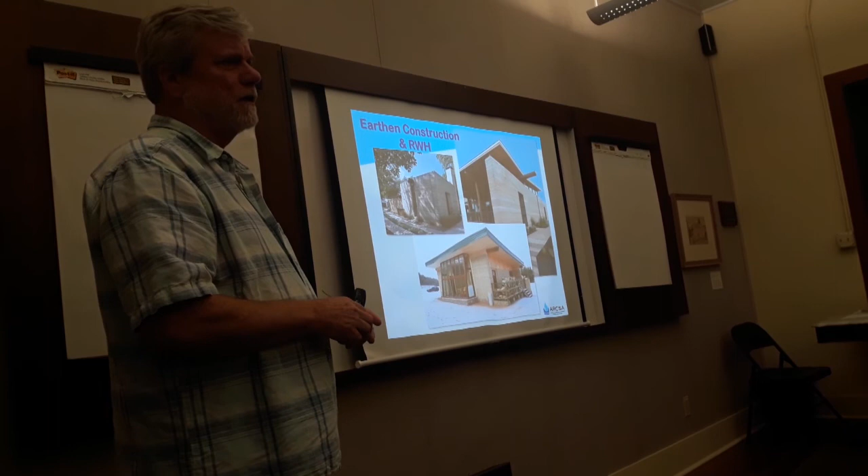So, in terms of a first flush, you have to go out in the rain and turn it off with an umbrella? No, actually, a long time ago, when I took my first class, this guy had an old Y fitting from an old one-room schoolhouse. It would start raining, and after it rained for a few minutes, the teacher would have one of the students go out and hit the baffle to change it, because it was going on the ground while it was cleaning the roof, and now it would bring it into the barrel. So it used to be manual. You have to do that still?

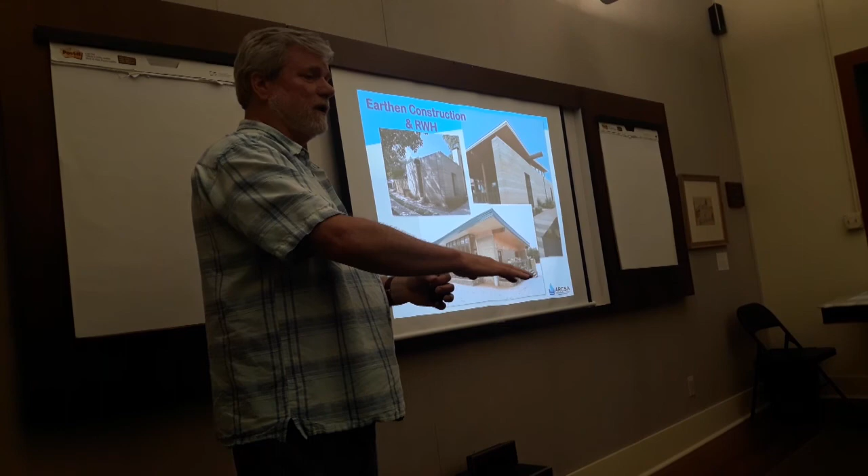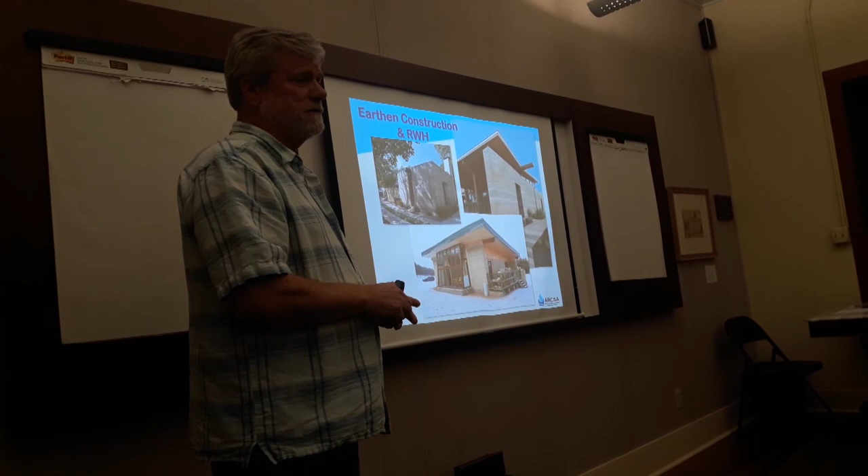No, it fills up, and then it'll evacuate eventually. All of the first flushes, even the larger first flush tanks, have a way that the valve is opened and it will drain real slowly after rain, evacuating that first flush. And then you have to get into that once in a while, because that's where all your debris from the trees and whatnot goes. That needs to be cleaned occasionally, but not that often. Again, using a screen on your gutter is a good first step.